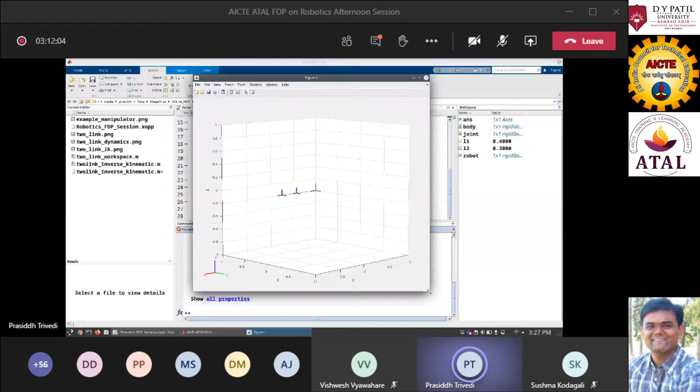So now here our two-link manipulator robot is ready. Now, what do we want to do? What do we want to manipulate with this robot? Let us give some path in the XY plane, and let us try to move this end effector on that path. And what path do we want to select? Let us select this circle.

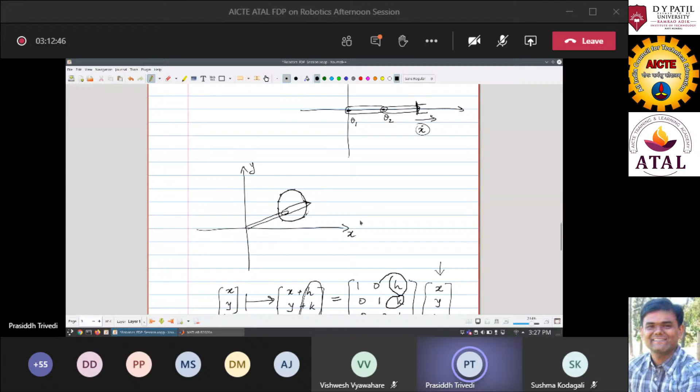So we'll put this circle's XY coordinates in an array, and then we will try to solve this inverse kinematics problem. This is an inverse kinematics problem which is hard and almost not solvable by hand. You can see here, for the inverse kinematics problem we had put up one equation: cos theta 2 is equal to x squared plus y squared minus L1 squared minus L2 squared divided by 2 L1 L2.

So for each x and y, we have to compute this theta 2, and theta 2 will have two values, plus or minus, and then there is also such an equation for theta 1. So this inverse kinematic problem has to be solved, and also the singular points have to be taken care of. Okay? So by hand it is an almost impossible task, but MATLAB has commands to solve this inverse kinematic problem.

So we will move ahead. First we will have to create this circle in MATLAB, and we should also check whether the path we have decided for the robot is coming under the workspace or not, right? So let me first create a circle with a radius of 0.15 meter, and we'll put a constraint that this is required as a column vector.

So count is equal to length of t, and we'll center our circle at 0.3, 0.1, and we'll put the z coordinate 0, and the radius will be 0.15. Then to create the points, we vary theta over this time.

Okay. Now, if we run this script again, we will see the circle that we defined along with the workspace, right? The workspace z coordinate we had kept as 1, so it has an offset on the z axis of 1 unit, and the circle we have plotted at z 0. You can see here, these are the zeros. We have kept the center z coordinate as 0.

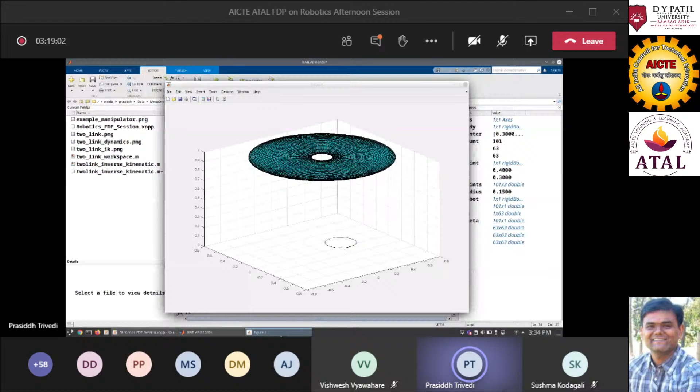So now, if we go to the XY plane, we can see that the circle is entirely covered by the workspace. That means our workspace covers this circle of points where we want the end effector to move. So the end effector can follow this path because the points fall within the workspace.

If I do this, for example, instead of the center being at 0.3, 0.1, if I keep the center at 0.6 and let's say 0.3, right? And then let us see that plot again. Now, let us check whether this circle falls within it. Yeah.

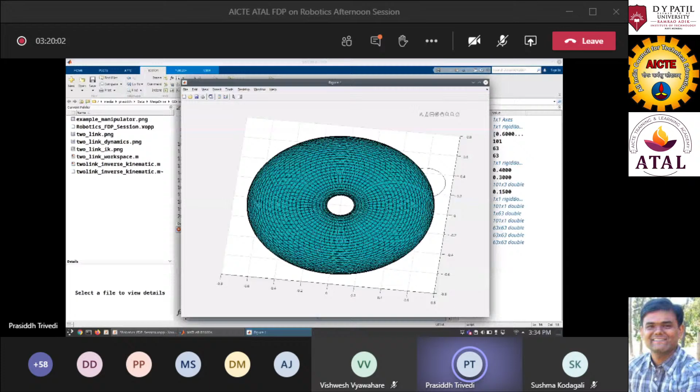Now you see that the circle falls outside the workspace of this mobile robot. So if this two-link manipulator has the workspace of this annular region, but the circle that we want the end effector to follow goes outside the region where the end effector can reach, this problem solution will fail.

Although we have not yet seen how to solve this inverse kinematic problem in MATLAB, even if we try to solve it, it will fail. The solution will fail because the solution does not exist. Okay, so this must be taken care of always.

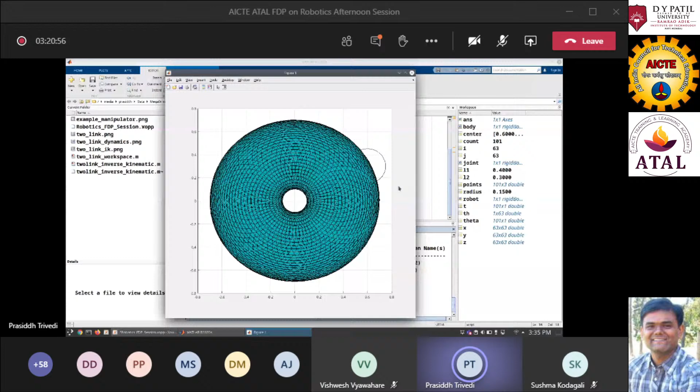So anytime you are working with these robotic manipulators and your programs or your coding is failing, one must see whether what you are trying to achieve with the robot is achievable or not. So it should be in the workspace region. Okay. So the initial circle that we made is within the workspace that we have verified. Now we move to solve the inverse kinematic problem.

Right? So to solve the inverse kinematic problem, first we need to define the home configuration. So where the robot is initially, from which location we want the robot to start moving. We want the robot to start moving from a point Q0, which will be coming from the command called home configuration.

Okay. And here we have a variable called n, that is length of Q0, that is degrees of freedom. Although I have not talked about degrees of freedom, I believe many of the participants are aware of the concept of degrees of freedom. So this is a two-DOF manipulator. This two-link manipulator is two-DOF because we have 2 degrees of freedom.

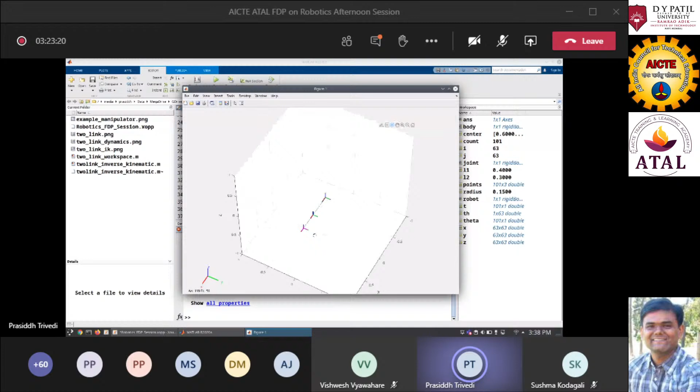So let us check what is the home configuration. Home configuration should be both theta 1 and theta 2 equal to 0, because if you remember when I showed this robot, this is the home configuration, where both theta 1 and theta 2 are 0. Right? So Q0 should be a vector of two elements, 0 0. So let us see whether the home configuration of the robot is 0 0.

Correct? So the robot is at rest and it is at home configuration. We have taken home configuration in a vector called Q0. We have also brought out the degrees of freedom from Q0, and then we are now ready for solving the inverse kinematic problem. So the command for the inverse kinematic problem is inverseKinematics.

Inverse kinematics for this rigid body tree problem. So MATLAB has inbuilt algorithms to solve this inverse kinematic problem. We will solve it and put our answer in a variable called IK. So this is not yet the complete solution. Here we have some weights also. What is the use of these weights? Let me explain when we move to the next part of the solution. Okay.

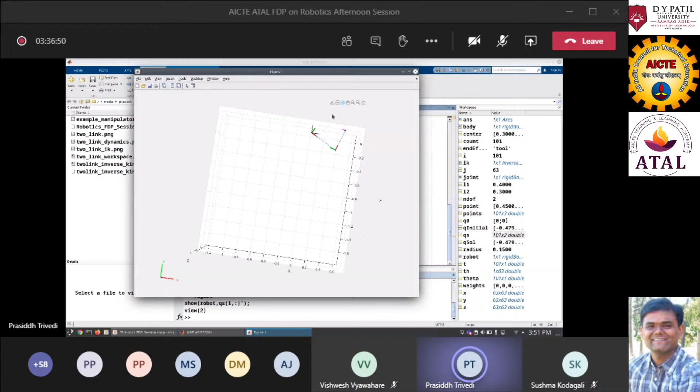Okay, now can you see that the robot has moved according to the q0. So this is our 0 0 point in the xy plane. According to the initial value that we had given, it has moved to the Q0. Now, so this is our xy 0 0 point, and the manipulator has moved.

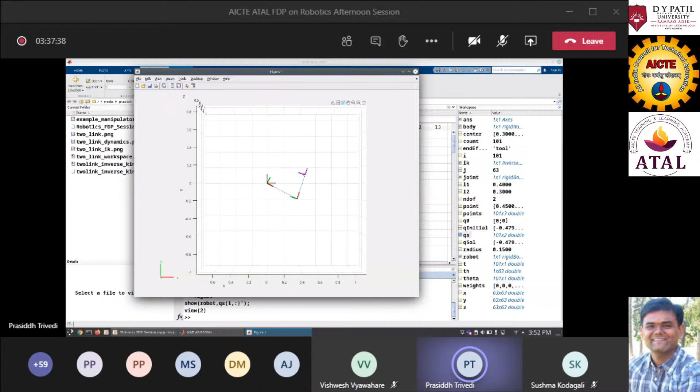So theta 1 is negative and theta 2 is some positive value. We can also compare it with the QS solution. So in the QS solution the first theta 1 is minus 0.4 and theta 2 is 1.7. So that is visible here. This is the x axis, y axis. Our origin is here, theta 1 is some negative value and theta 2 is some positive value. This end effector is at the circle that we want to trace.

Okay. So this is the first point that we have plotted, and we have seen that it is correct. Now we have to loop this entire procedure in a for loop. So we'll put some properties on the axis, because we just want to see the xy plane. I was rotating in 3D, but we can set the axis property by using this command also. We fix the axis as orthographic on this figure.

We also plot the circle, so we see whether the end effector is moving on the circle that we have defined or not. We plot the circle and we restrict the axis, okay, so that is the setup of the figure.

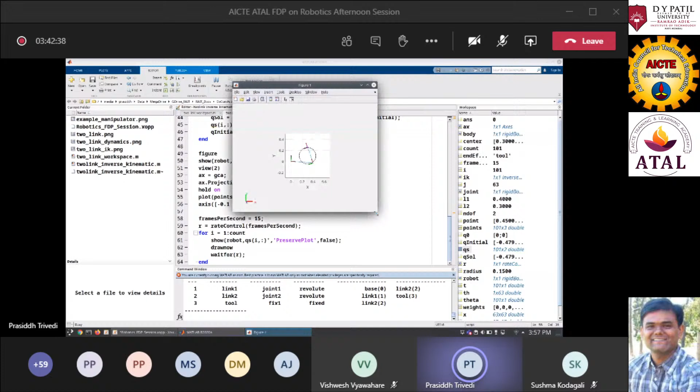So the issue here: instead of points, I have put point. Okay. So now we will see that circle also and the end effector moving on the circle. Okay. So we have created this circle. So this is the path we want our two-link manipulator to move on. And then this is the inverse kinematic problem, a considerably harder problem.

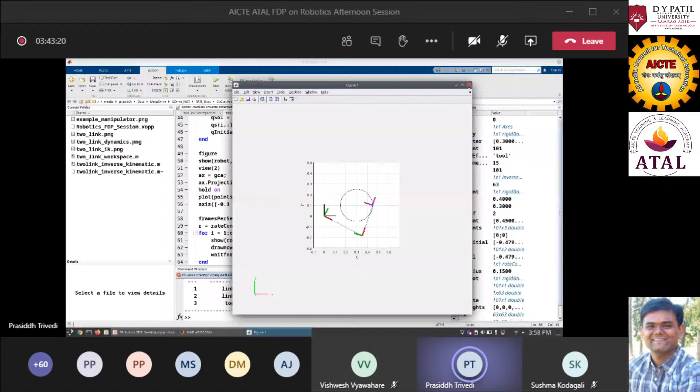Then we solve this problem using MATLAB's Robotics Toolbox commands: we define this circle's XY points, and then we solve that inverse kinematic problem to give us theta 1 and theta 2 angles such that this end effector will move on the described circle. Okay, so that is the end of, I think, this example. This example is, I believe, understood very well.

And if there are any questions on this example, we can see, or we will move to the last part of this session. The last part of this session consists of dynamics. So after understanding the kinematics, inverse kinematics, workspace, Jacobian, almost all the concepts we have covered by using this small example, and we also saw how to create a robot geometry in MATLAB.

One important related concept before we move to the dynamics is this URDF model. So you might have been introduced to the URDF model on day one by Ajit, that the URDF format for robots is used in ROS, and many manipulators nowadays are running ROS. Right? So if you have some industrial manipulators, manufacturing business, those who are making robotic manipulators for industrial automation.

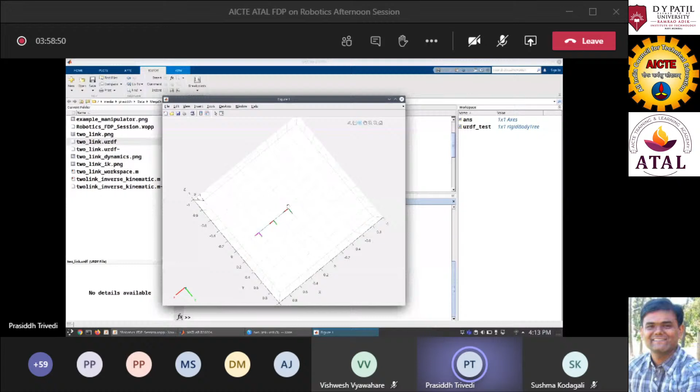And if you want to see this robot, just like earlier robots, we were looking at those robots using the show command. We can look at this robot also, URDF_test, and it will show that. So it looks similar. We have created the same robot, so it is similar, right? So it starts at 0, 0, and then there are two links. This is your XY plane and 0, 0 origin. Then there are two links, both of 0.3 meter length.

Right? So this way we can import URDF models. If you have already studied the URDF format and you know how to write in URDF format, then you can use this facility to import a URDF model to MATLAB, and then solve all the kinematics problems. And in this XML, you can do a little bit more, in that you can put colors and you can flesh out the links properly.

For example, I have this same URDF model with a different visual field. So let me put it here and import that model. So instead of two-link, visual URDF, and then show. So now you can see both the links have different colors. One is red and green, and the end effector is also shown as a cylinder. Okay, so you can do this.

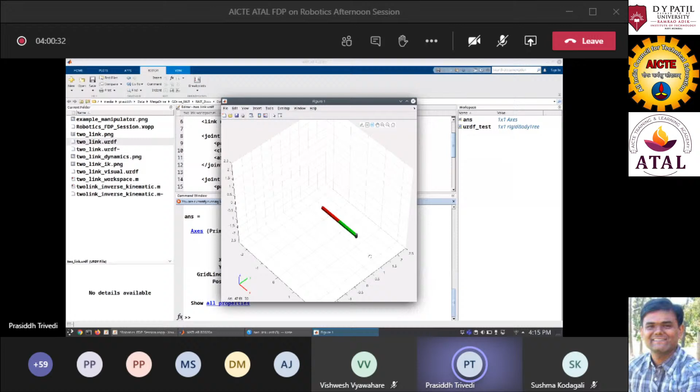So now you have this rigid body tree model, and again, if you solve the inverse kinematic problem with the animation, it looks a little bit better. So this was the URDF model. I will not go through that URDF in detail, just show that we have created a material tag, which is a URDF tag, with material name red and its color, green and its color, and then we have used this material while creating the links in this URDF. Right? So you can do good stuff when you combine ROS URDF and the MATLAB Robotics Toolbox.

Okay, so I think that is a good enough introduction to robotic manipulators. The last topic that I wanted to talk about for 15 minutes is dynamics. That will complete this robotic manipulation problem. So far, what we have done is we have created a robotic manipulator, a two-link manipulator like this, and then we made this two-link manipulator follow a trajectory given inside its workspace.